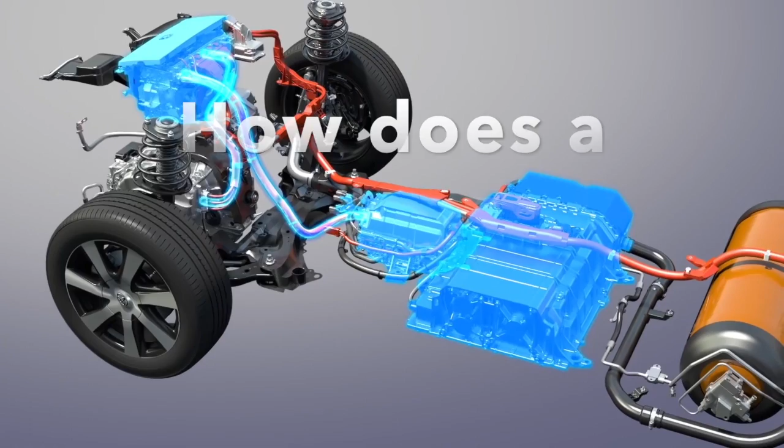So how does a hydrogen engine work? Powered with electric motors, hydrogen fuel cell cars are also known as e-cars. The common abbreviation is FCEV, short for Fuel Cell Electric Vehicle, in contrast to a BEV, or Battery Electric Vehicle.

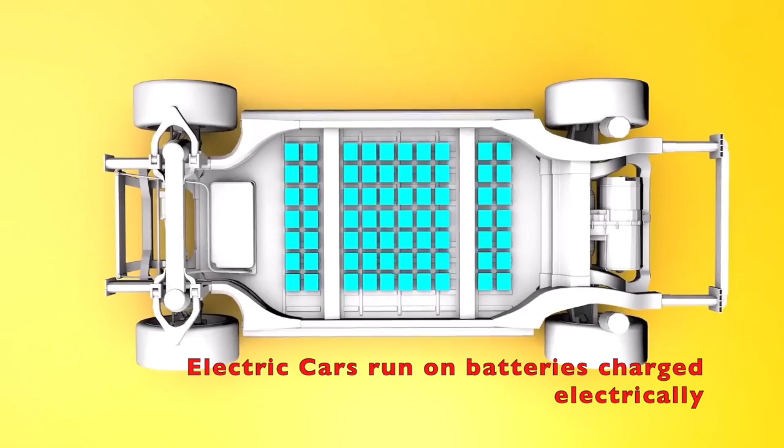One main difference between electric cars and hydrogen cars is the source of electricity. While electric cars run on batteries charged electrically, hydrogen cars produce their own electricity, as they have their little power plant on board. This power plant is the fuel cell.

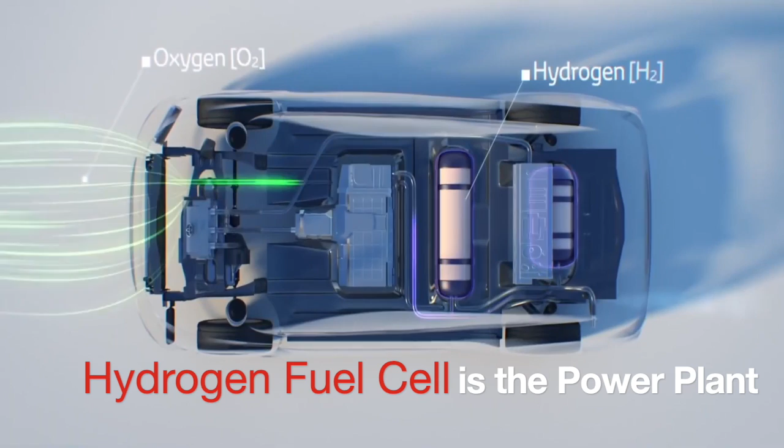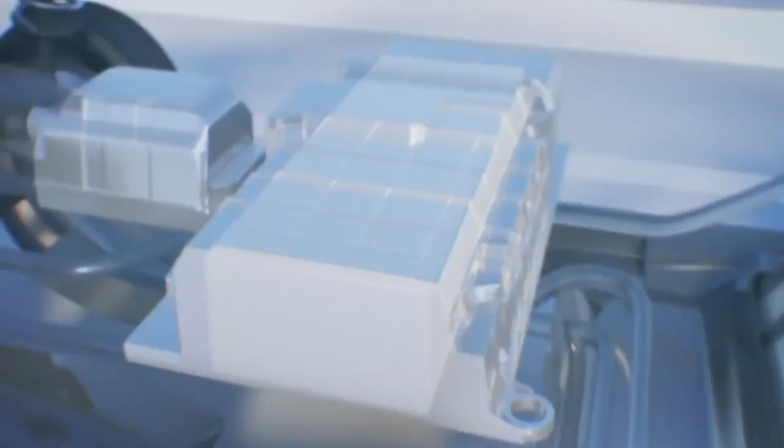First comes air. The FCEV's front intake grills deliver the outside air to the fuel cell system, which makes electricity. Hydrogen travels from the tanks to the fuel cell system. In the fuel cell system, hydrogen and oxygen from the air combine in a chemical reaction that creates electricity to power the vehicle, moving you forward.

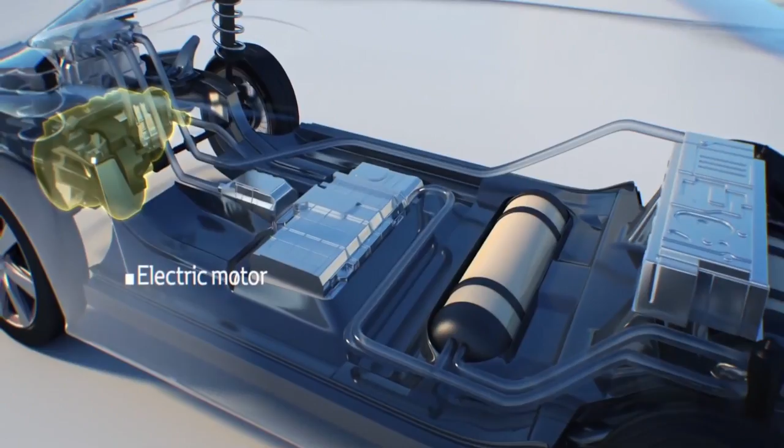When you put your foot on the accelerator, electricity from the fuel cell system is sent to the motor, leaving nothing but water. In the end, the only byproduct of creating electricity with hydrogen and oxygen in our fuel cell system is water, which leaves through a hatch located on the bottom of the Mirai.

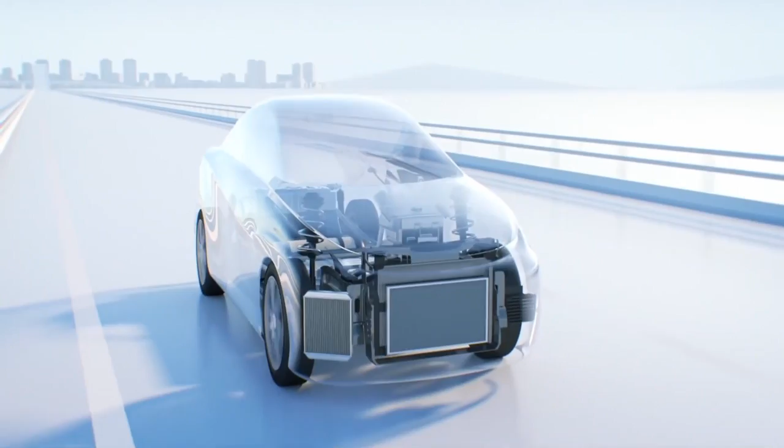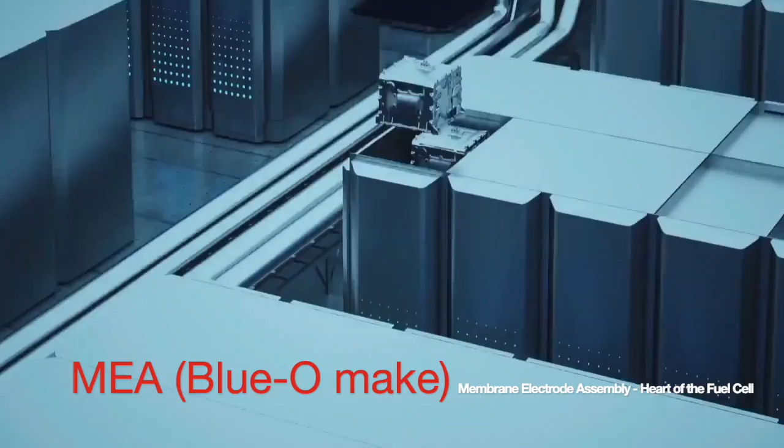The advantage of combining fuel and oxygen in a cell is that you can, in theory, convert most of the chemical energy to electricity, whereas burning them, as it happens in the internal combustion engine of a car, has a maximum efficiency of about 50%. In practice, only about 25% of the chemical energy does the useful work in driving the engine. The rest comes out as waste heat.

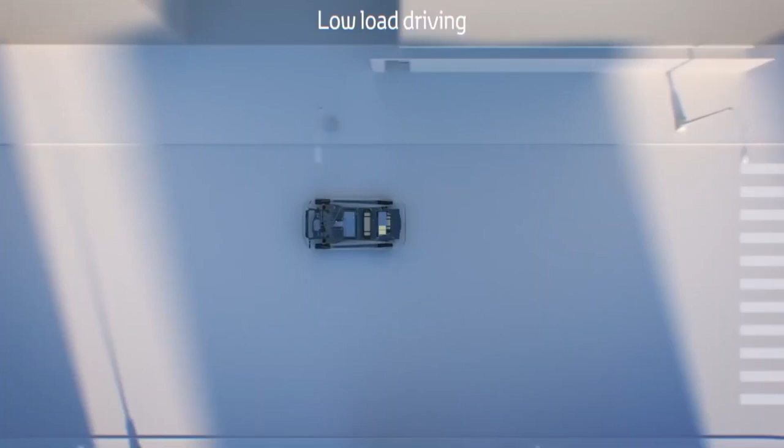How is this electrical energy utilized? Electrical energy produced during the reverse electrolysis process goes either to the electric motor to power the FCEV directly, or to traction batteries for charging purposes, depending on the driving situation at a specific time, while water leaves the system as water vapor. Traction batteries are smaller and lighter than the batteries used in electric cars.

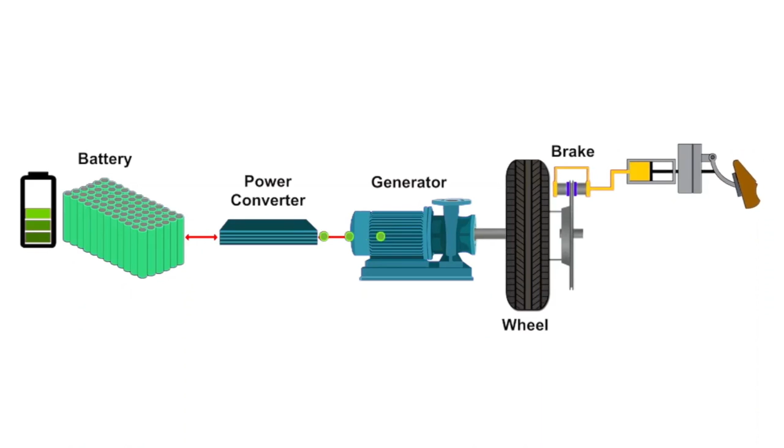Like other e-cars, hydrogen vehicles can also recover or recuperate braking energy. The electric motor converts the car's kinetic energy back into electrical energy and feeds it into the backup battery.

Let's look at some of the advantages and disadvantages of hydrogen-powered cars for users. The pros and cons of a particular propulsion technology can be seen from two main perspectives, that of the user and that of the environment. First, hydrogen as an energy source is very promising.

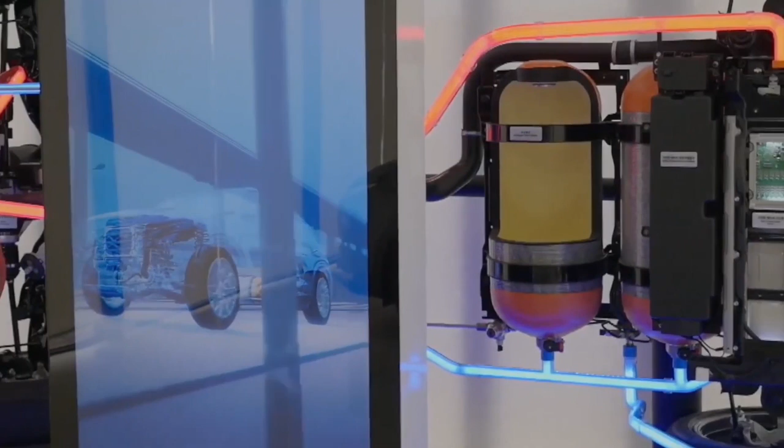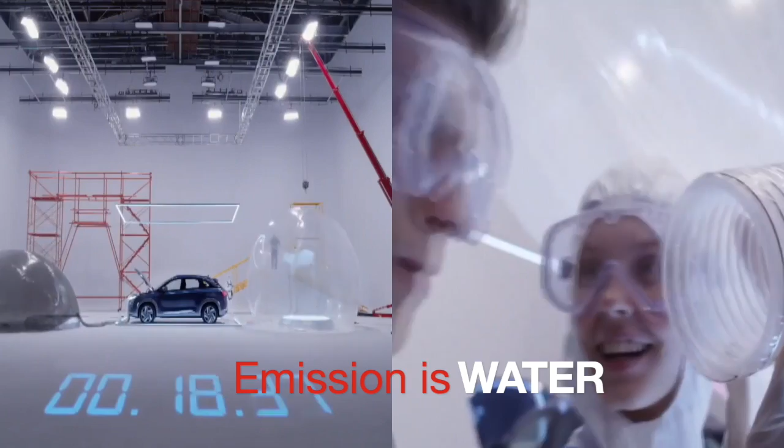Also, unlike fossil fuel combustion engines, the byproducts of the combustion of hydrogen in fuel cells include energy, water, and heat. No greenhouse gas is produced, making hydrogen clean, non-toxic, and safe for all components of our planet. Besides, hydrogen energy is 3 times more potent than gasoline and other fossil-based sources of fuel. This means that you need less hydrogen to complete an enormous task. This is why hydrogen is commonly used as fuel for spaceships.

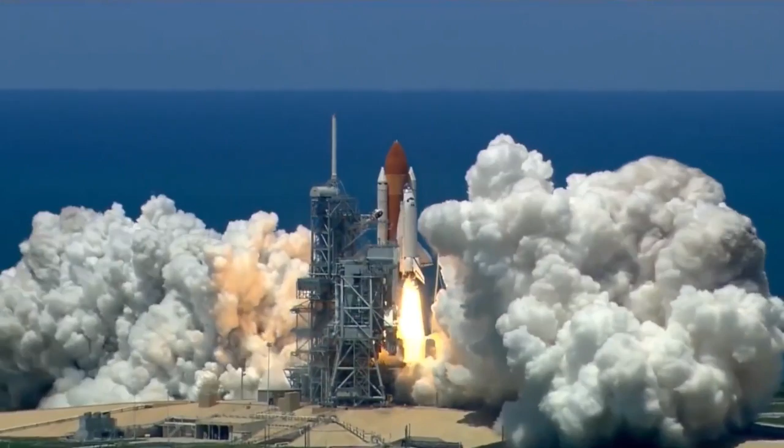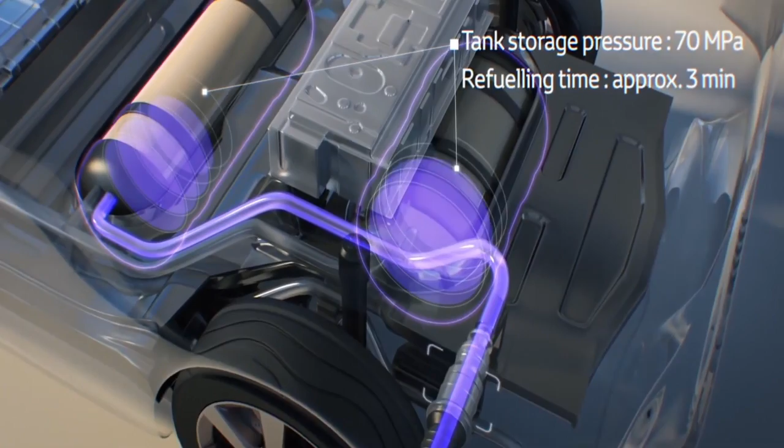A vehicle that utilizes hydrogen energy will travel more miles, almost 300 miles with full hydrogen tanks, than one that uses an electric battery. Also, vehicles that use hydrogen take between 3 to 4 minutes to refill, while those that use batteries take between 30 minutes to 12 hours to refill. That's a lot of time to spare. Moreover, hydrogen cars have pure electrical propulsion, resulting in virtually no engine noise at all.

Despite all these advantages, hydrogen energy has its disadvantages. The biggest disadvantage of this technology is the non-availability of refueling stations. Special fuel pumps for these cars are as low as 41 in the United States, compared to 80 in Germany. Low numbers of on-road hydrogen vehicles don't encourage operators to establish special refuel pumps. The irony is, the few fueling stations are a major reason for fewer hydrogen cars on roads.

Chicken and egg problem, right? BMW's homeland of Germany leads the way in terms of finding a solution. They have joined a program with hydrogen producers and operators to expand the hydrogen fueling station network to 130 stations in the next 3 years, fueling up 60,000 cars in Germany. The next target is to establish 400 stations by 2025.

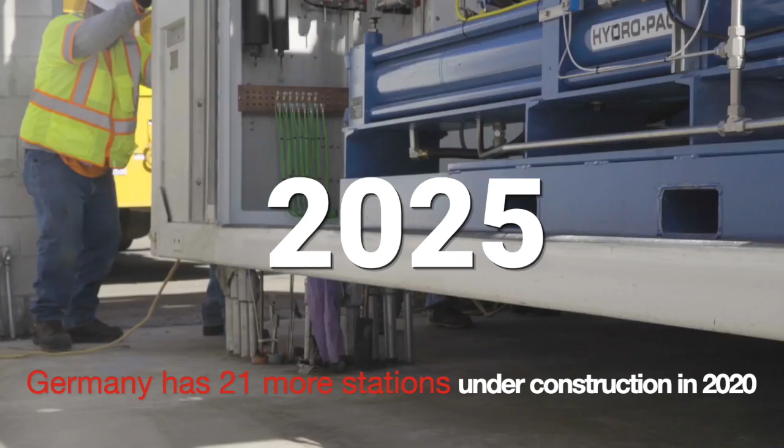Now, let's talk about the cost. The other reason we see less hydrogen cars on the road is the price. For example, in terms of range and distance, FCEV tends to perform better than BEV. The least expensive mass-produced electric cars that tend to offer battery ranges of about 300 miles is the Tesla Model 3 Long Range that has a range of 322 miles with a price tag of $40,000.

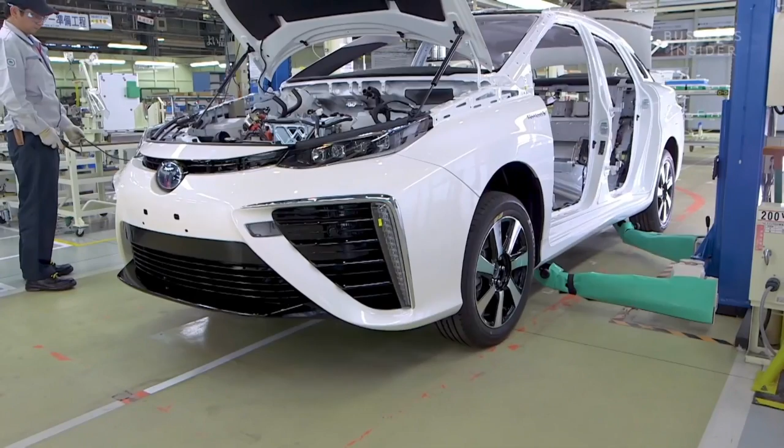On the other hand, the hydrogen-powered Hyundai Nexo comes with a real-world range of 414 miles with a price tag of $59,000. So in terms of range alone, hydrogen vehicles have the upper hand.

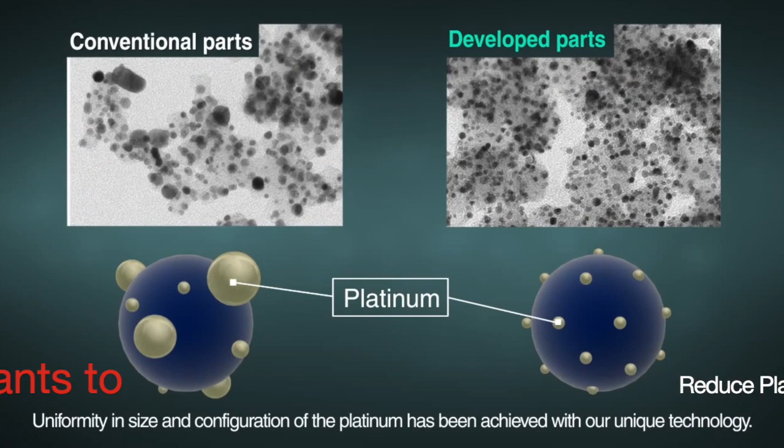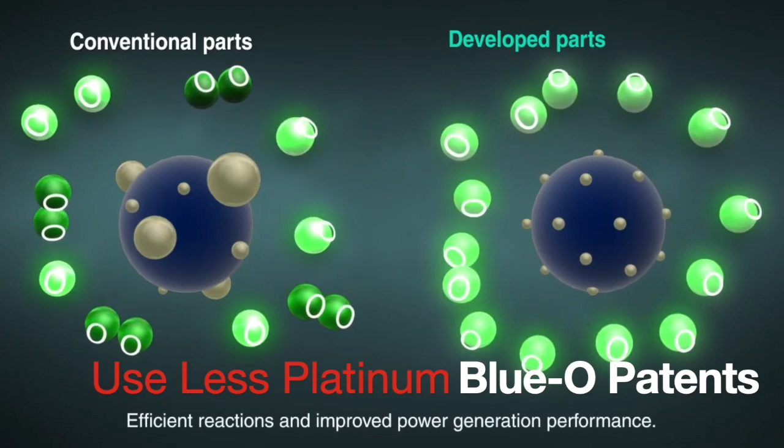In addition to less industrialized production, these cars are expensive because platinum is used as a catalyst during the power generation. As the metal is expensive, manufacturers are trying to reduce its need to reduce the total cost of a hydrogen car. The cost will be the same as that of electric cars once the desired platinum reduction is observed in manufacturing. Operating costs are yet another reason for slow mass adoption of these cars.

On average, hydrogen fuel prices $13.9 per kilogram, while gasoline prices are around $2.44 per gallon. Hydrogen cars use an average of 0.8 kilograms of hydrogen per 100 kilometers, while petrol cars use around 1.5 gallons of petrol per 100 kilometers.

So, if you spend $70 to get 5 kilograms of hydrogen and $40 to get 16 gallons of petrol, a hydrogen car will only travel a distance of 625 kilometers, while a petrol-powered vehicle can go as far as 1,090 kilometers. That's a huge difference. However, NREL estimates that hydrogen fuel prices may fall to the $10 to $8 per kilogram range in the 2020 to 2025 period. Could be reduced significantly.

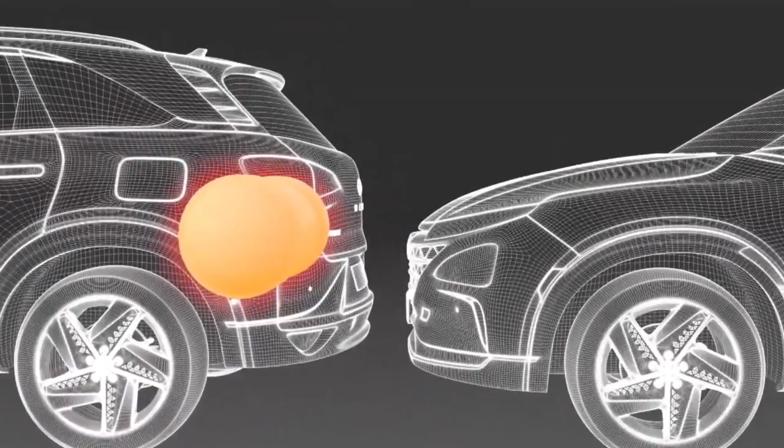Let's delve a bit more into safety requirements. Global Technical Regulation Number 13 is an agreement between Japan, Europe, and North America that sets the safety requirements that all high-pressure hydrogen systems must adhere to. Compliance with this regulation is tough and requires hydrogen tanks to be dropped, frozen, damaged, exposed to chemicals, hydraulically and pneumatically cycled, stuck on a bonfire, and ultimately burst to ensure tank performance throughout the lifetime of the vehicle.

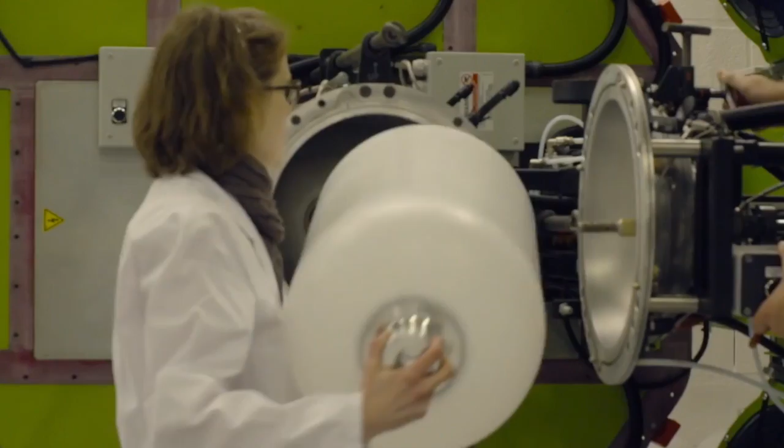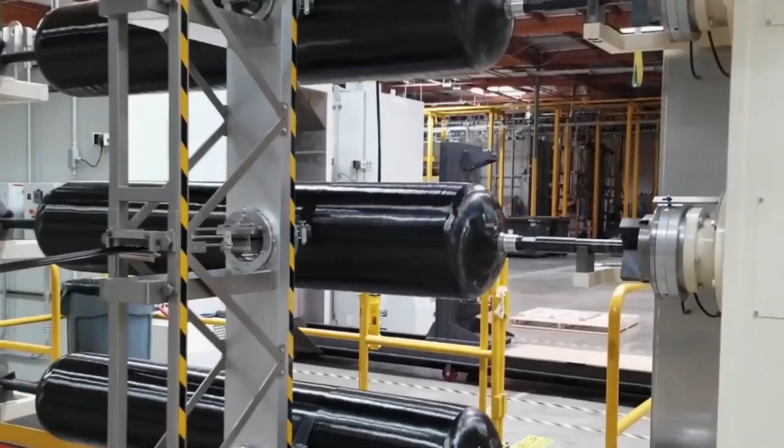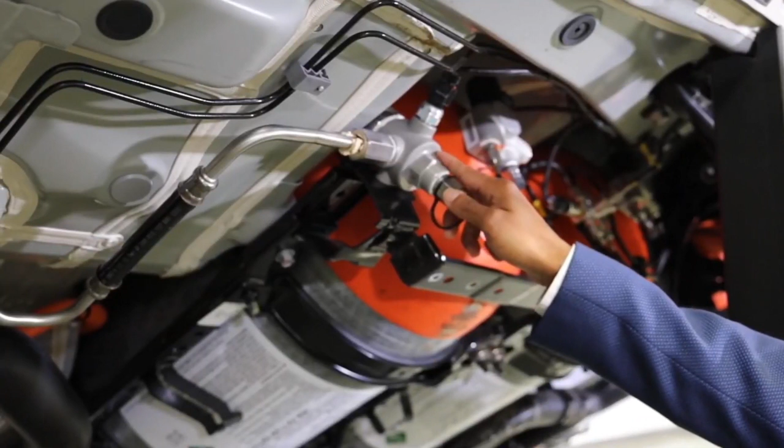Therefore, engineers have worked to ensure that hydrogen tanks are designed not to leak. The new multi-patented carbon fiber-wrapped polymer-lined tanks are built in a 3-layer structure and absorb 5 times the crash energy of steel. In a high-speed collision, sensors stop the flow of hydrogen. To prevent hydrogen from traveling to potentially damaged systems outside of the tank, the system is designed to automatically shut off the tank's hydrogen output valve.

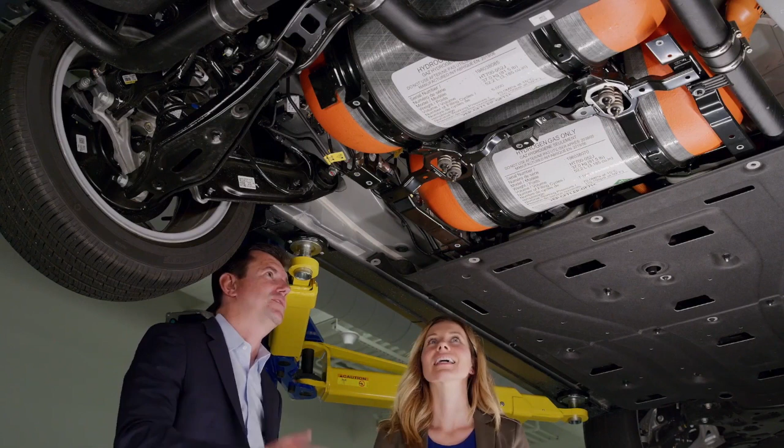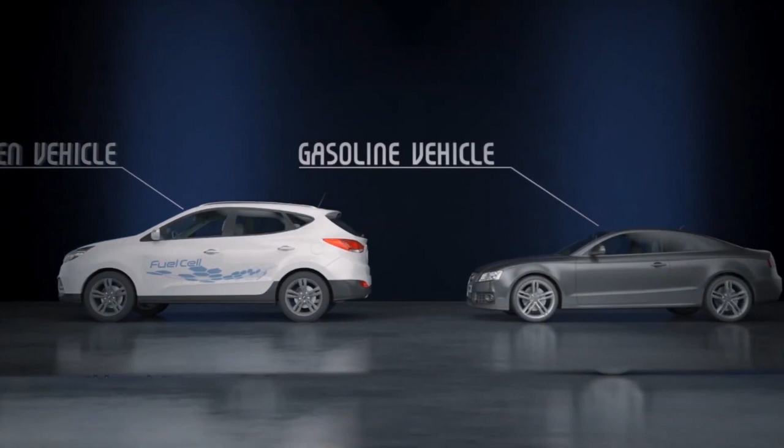Any leaked hydrogen is quickly dispersed. All hydrogen-related parts are located outside the cabin and are designed to help prevent leaked hydrogen from building up. Toyota even tested their carbon fiber tank by shooting it with a .50 caliber round. The tank didn't explode, it simply released hydrogen safely into the atmosphere. Since hydrogen is lighter than air, it rapidly disperses, reducing the time to cause damage in the event of an ignition. Hydrogen is arguably safer than gasoline, so safety isn't a huge concern for hydrogen, which is good for FCEVs.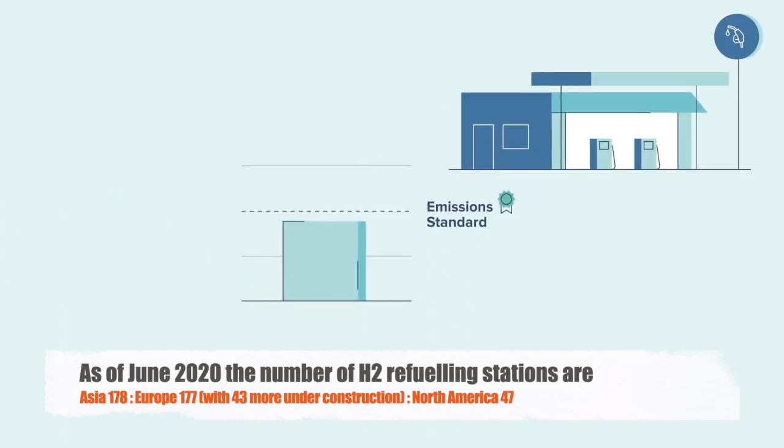How well distributed are FCEVs as of present? Well, if you live in California, there's a chance you might have come across one FCEV before. There are nearly 8,363 of them currently on California roads. The Low Carbon Fuel Standard (LCFS) Hydrogen Refueling Infrastructure (HRI) credit provisions took effect, predicated on the goal of reaching 200 hydrogen stations by 2025. The 4 California stations are the first of a series of stations intended by Iwatani for deployment in the western part of the United States.

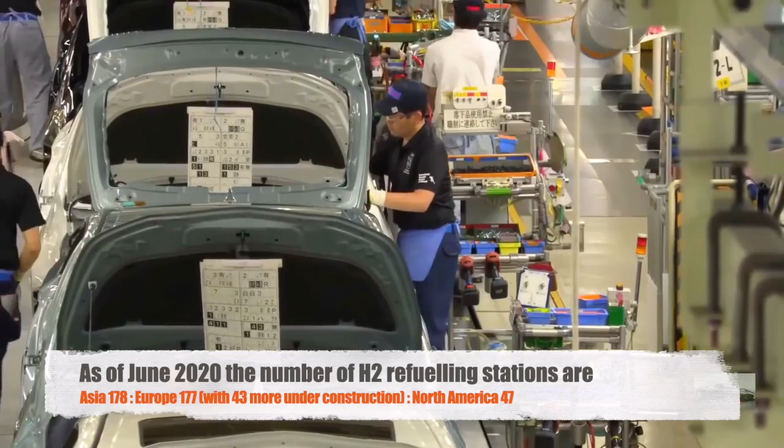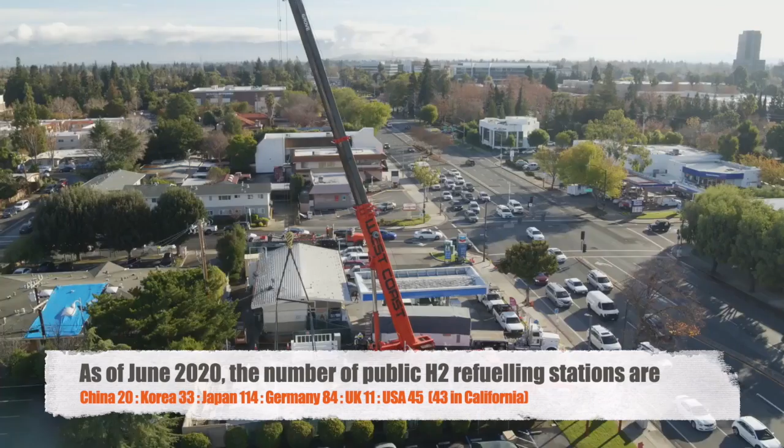Current auto manufacturer provided projections for on-the-road FCEVs are 26,900 in 2022 and 48,000 in 2025. Today's network of 41 open hydrogen fueling stations has established the early fueling market that enabled the launch of the FCEV consumer market in California. Of the 24 funded stations currently under construction, 11 are projected to open later this year.

So that ends this topic. I hope you have been able to gain something new today about hydrogen cars and fuel cell technology.